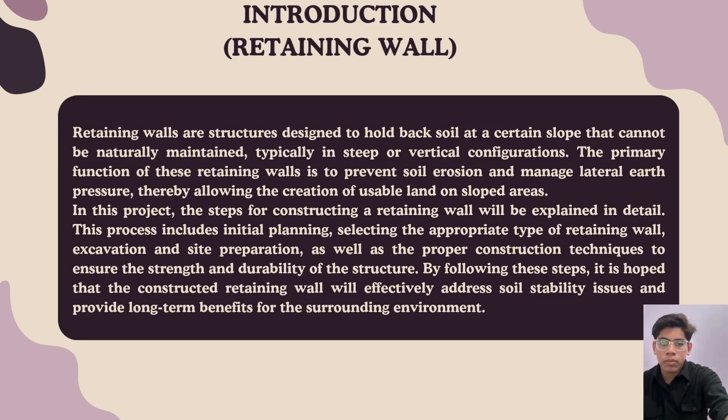Okay, next I will be explaining the methodology. The first method is types of retaining wall. Second is step by step of retaining wall. Third, method of construction with sketch of retaining wall. And the fourth is issues and problems during the construction of retaining wall. But here I will explain two methods only: first, types of retaining wall, and second, step by step of retaining wall.

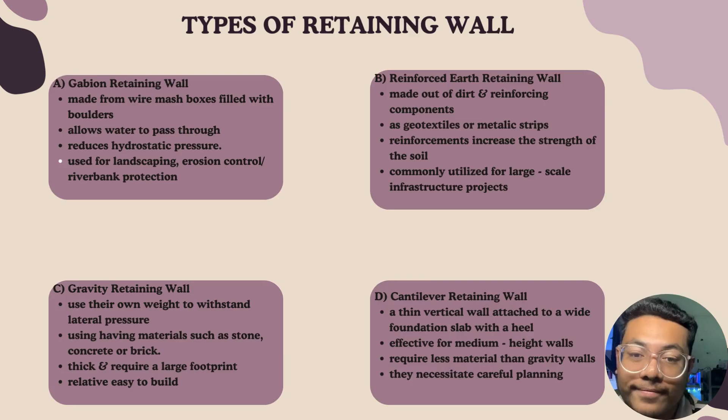Okay, next I will be explaining the step by step of retaining wall. The first step is substructure, meaning below ground. The first point is site assessment or soil analysis. For example, we conduct a geotechnical investigation to determine soil qualities, including bearing capacity and slope stability.

The second point is design and material selection. We must determine the type of retaining wall, for example gravity, cantilever, or gabion, based on soil characteristics, available space and budget. And we must choose components such as concrete, stone, steel or geotextile.

The third point is excavation and site preparation. We should remove vegetation, debris and any loose or unsuitable soil and excavate to the proper depth for the foundation. The fourth point is foundation construction with substructure. It means we must build a reinforced concrete footing or an appropriate base material for other types of wall, and provide appropriate foundation measurements depending on wall height and soil pressure. And this point is for structures made of reinforced concrete, like installing rebar.

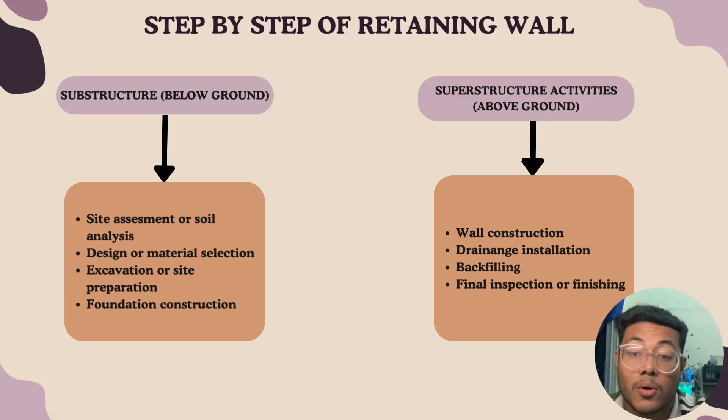I want to present my part, the method of construction of retaining wall. The first step in construction of a retaining wall is setting out. Setting out determines the precise location and alignment of the retaining wall based on design specifications. Setting out uses stakes and string to ensure accurate position and height. Setting out also helps identify soil contamination and determine a design suitable for the ground condition.

The next part is excavation. The excavation is to prepare the work area by excavating at the retaining wall location.

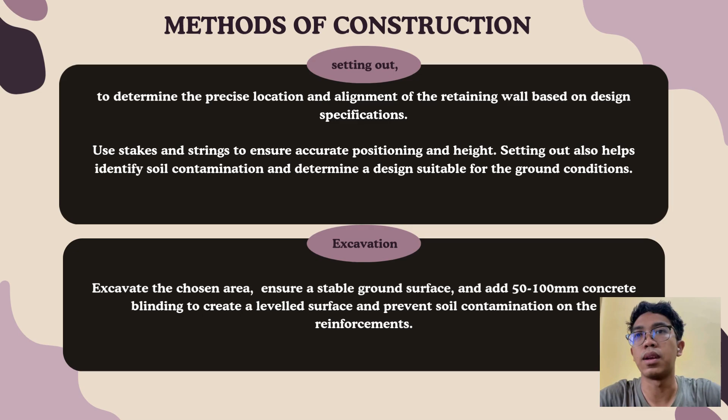Excavate to the required area, ensure a stable ground surface, and add 50 to 100 mm concrete to create a leveled surface and prevent soil contaminating the reinforcement. The next method of constructing a retaining wall is formwork. We must place the formwork on the foundation surface with a minimum 40 mm cover for the reinforcement.

And the next method is reinforcement. We must arrange the reinforcement bars with a center to center distance of about 600 mm or 800 mm depending on the block size used. Accurately place starter bars and add an additional layer of reinforcement bars.

The next is inspection. In the inspection, we ensure all components are ready for the concrete pouring. We inspect the formwork, reinforcement, and starter bars to ensure that they are correctly positioned and undamaged. Verify that all preparations meet design specifications.

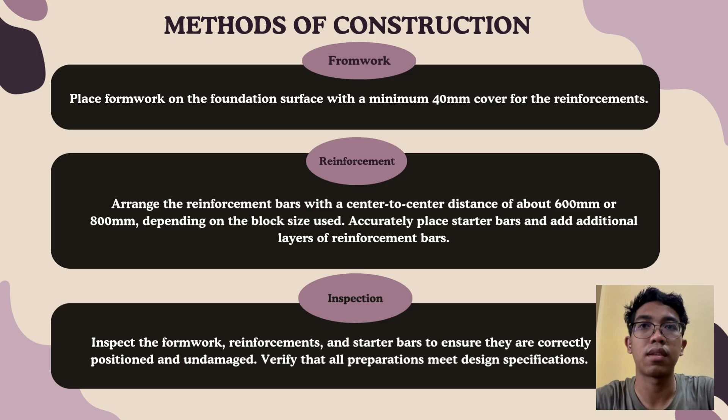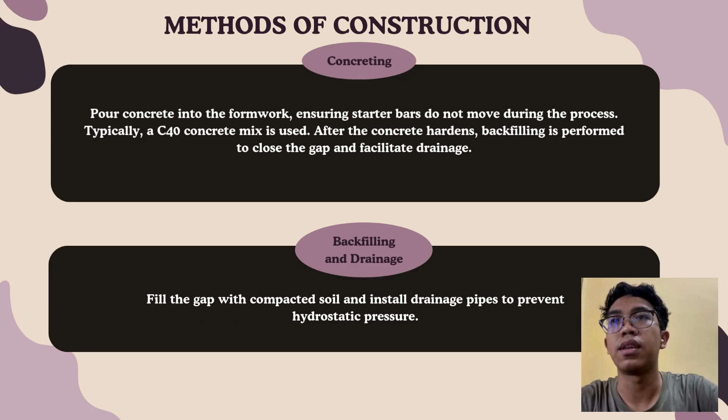Next method is concreting. You must put the concrete into the formwork, ensuring starter bars do not move during the process. Typically, a C40 concrete mix is used. After the concrete hardens, backfilling is performed to close the gap and facilitate drainage. And the next is backfilling and drainage. Fill the gap with compacted soil and install drainage pipes to prevent hydrostatic pressure.

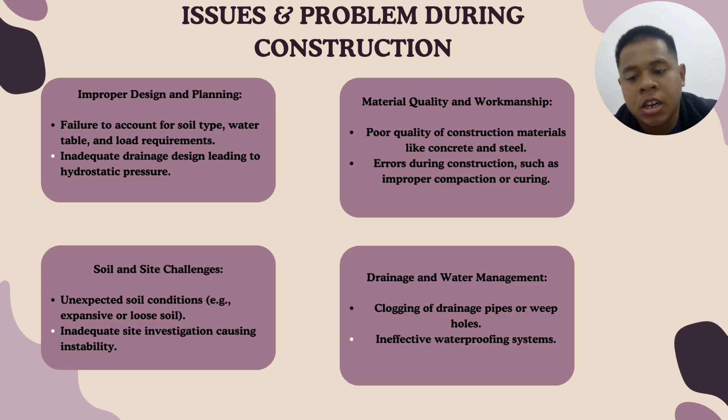The other one is structural failures. Structural failures such as cracking or tilting are common issues during and after construction. These are often caused by excessive pressure, soil movement, or overloading. Ensuring the wall is built within its design capacity is crucial to avoid such failures.

Environmental and external factors also pose significant challenges. Seismic activity, heavy rainfall, or freeze-thaw cycles can impact the wall's stability. Preparing for these conditions requires advanced planning and the use of suitable construction techniques.

And lastly is cost and time overruns. Cost and time overruns are frequent problems. Unexpected site challenges or design modifications can delay construction and inflate budgets. Proper project management and contingency planning are essential to minimize the risk.

So in conclusion, the construction of retaining walls involves several potential issues, ranging from design flaws to environmental challenges. Addressing these problems requires careful planning, quality material, and skilled workmanship. By understanding and mitigating these risks, we can ensure the success and longevity of retaining wall projects.

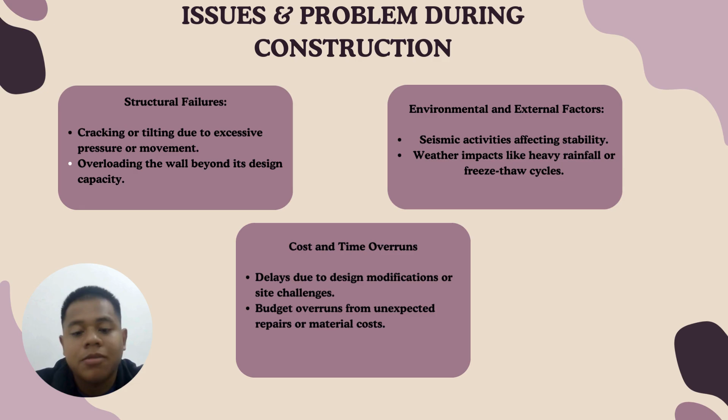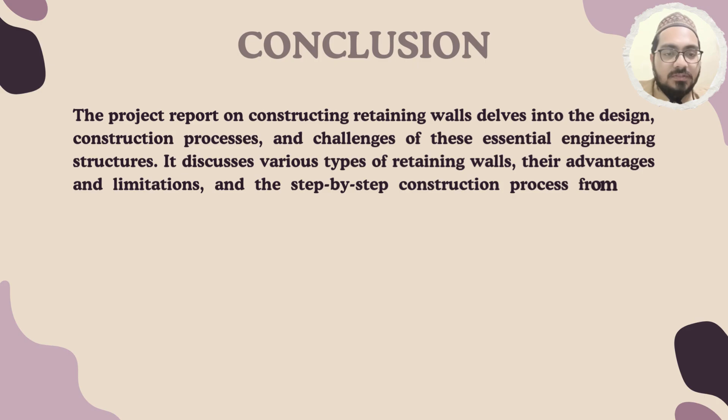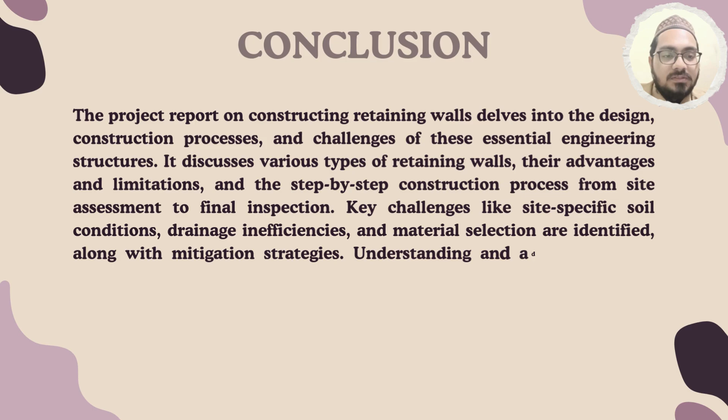I will present the conclusion. The project report on constructing retaining walls delves into the design, construction process, and challenges of this essential engineering feature. It discusses various types of retaining walls, their advantages and limitations, and the step-by-step construction process from site assessment to final inspection. Key challenges like site-specific soil conditions, drainage inefficiencies, and material selection are identified, along with mitigation strategies.

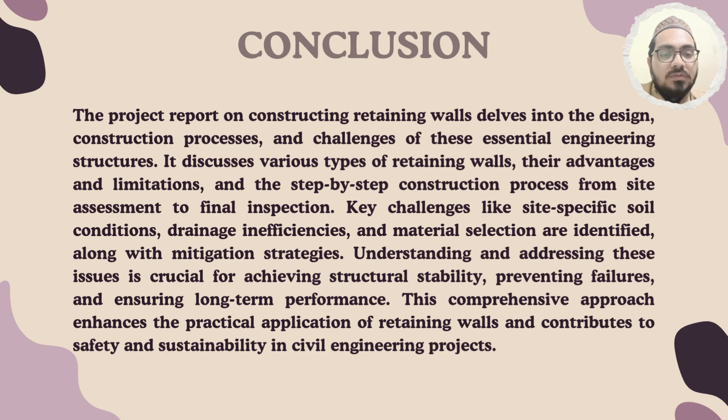Understanding and addressing these issues is crucial for achieving structural stability, preventing failures, and ensuring long-term performance. This comprehensive approach enhances the practical application of retaining walls and contributes to safety and sustainability in civil engineering projects.